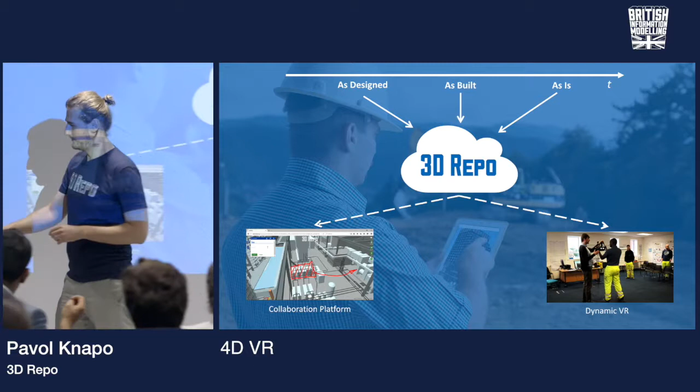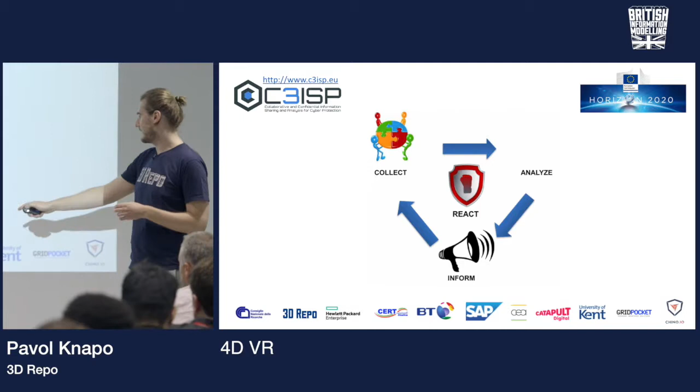At the moment we have a web viewer with really good, nice, neat issue tracking functionality, and also another application at this stage is our virtual reality application. We did one for health and safety, and we will talk more about the 4D one in a second. Security is becoming not just a buzzword but a real issue these days. We're also working with all these partners on a security innovation project, Horizon 2020.

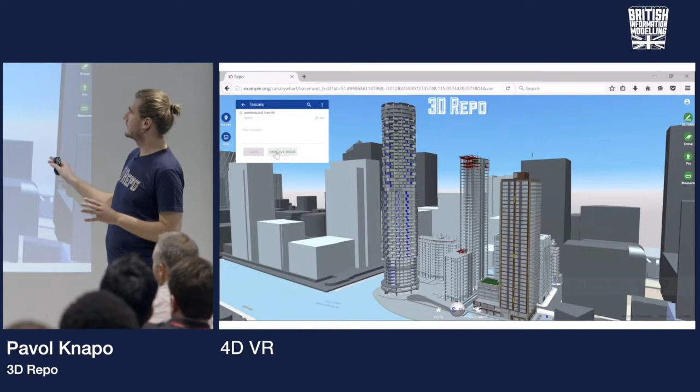So this is 3D Repo in a nutshell, in a quick video. It runs on a web browser, so that's one of the key features or key aspects. You don't need to install anything. We can support really large models, really pushing it until the breaking point.

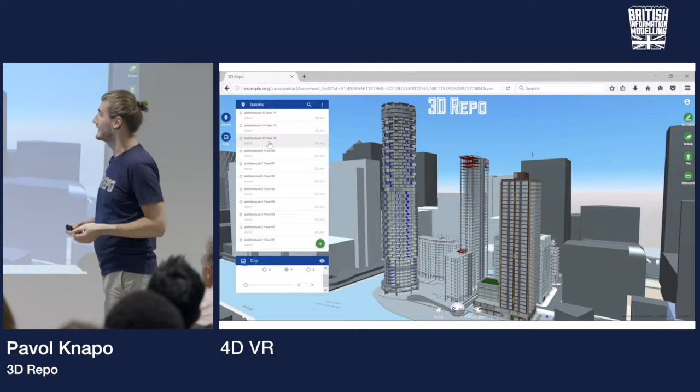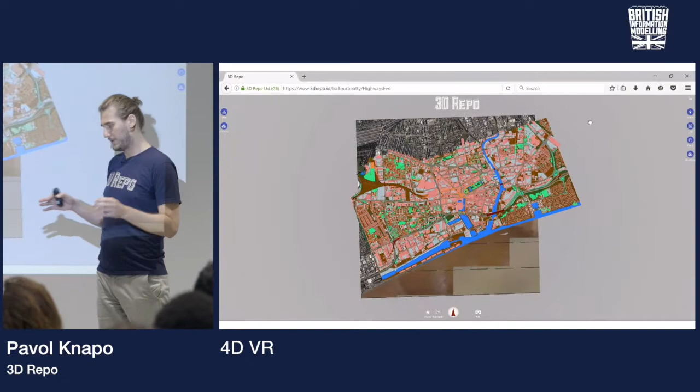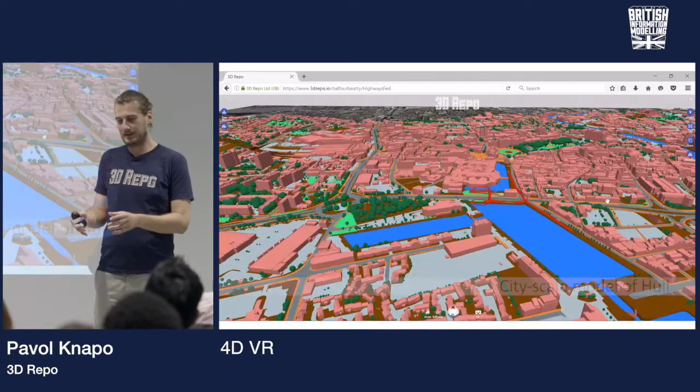But at the moment we can support a project in Canary Wharf, for example, with all not just the geometry but also the metadata. We try to also tap into the GIS world, because for us, BIM and GIS, the difference is just the scale. It's still, you have some geometry, you have some data, somehow structured. So we are fairly agnostic.

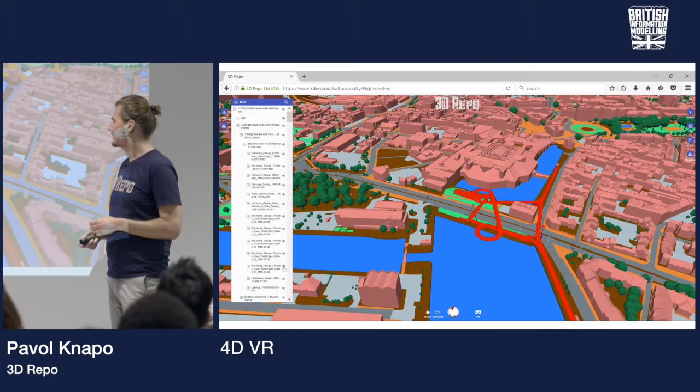So this is, for example, a project from Hull, where we worked with Balfour Beatty and Arup on some improvements of the streets there. And I hand over to Elliot to talk more about Bryden Wood.

Thanks, hi, so I'm Elliot. I'm the head of VR and AR in Bryden Wood. Who are we? So we are an integrated design and operation consultancy for the built environment, and our activities span from analysis to business strategy, engineering and architecture.

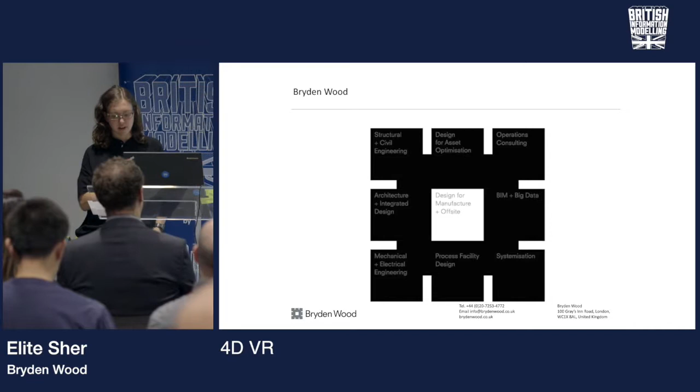We have a wide range of large-scale projects such as healthcare, residential, aviation, pharmaceutical, highways, and more. And BIM is very inherent to the way we work, so we also help shape BIM as an approach for the construction industry. We have a very unique approach to BIM and big data, which allows us to broaden and maximize the potential of the digital models that we work with, and it actually links to every step along the process.

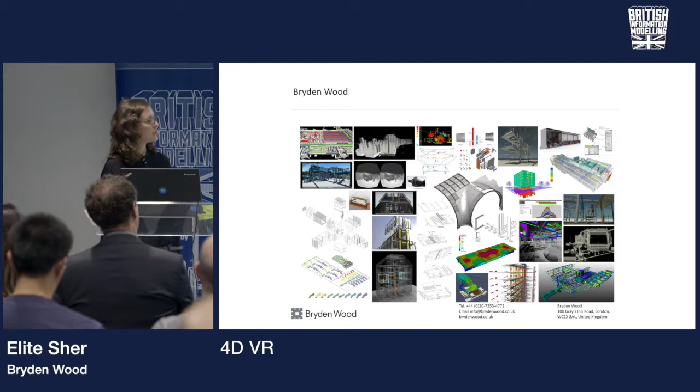So it starts from the business strategy all the way to the actual design. Our pioneering VR and AR work is actually part of the growth of the digital capabilities that we have. We focus mainly on creativity, productivity, collaborative work, and data analysis, and they are all integrated into our existing workflows.

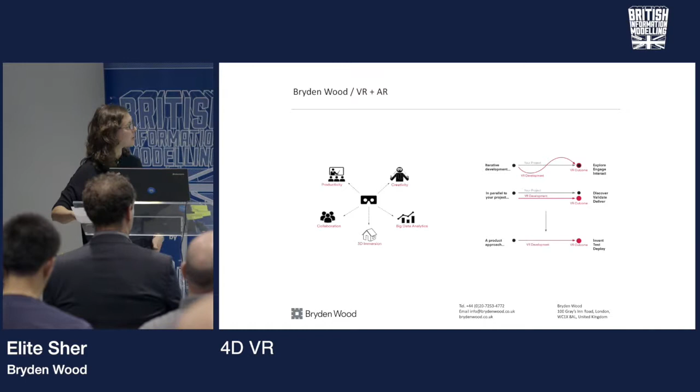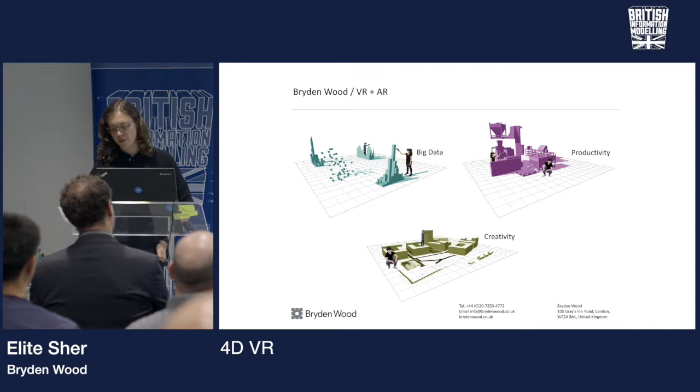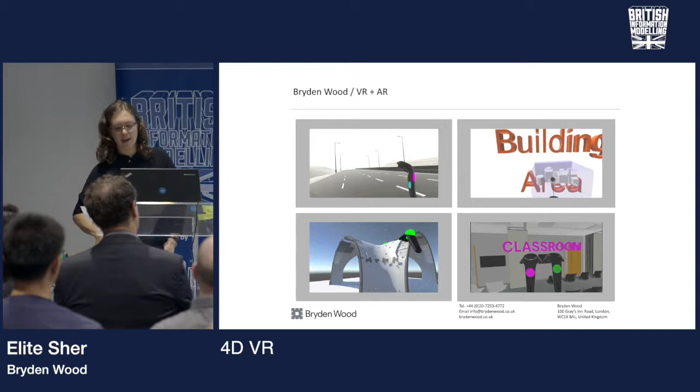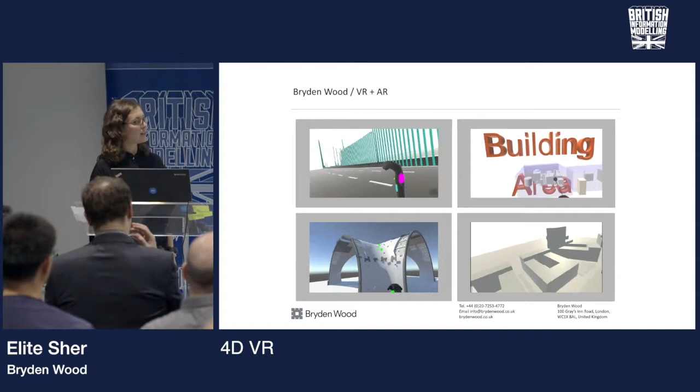Basically, the way we work is we work with our internal teams and our clients to develop bespoke VR and AR tools that would be part of the design process or standalone features. We use AR and VR for strategy, design, and delivery. And as part of our R&D work, we creatively develop features and then partner with companies like 3D Repo to implement them in a more complete and applicable way. I think the 4D sequence feature is a good example of the great collaboration that we had.

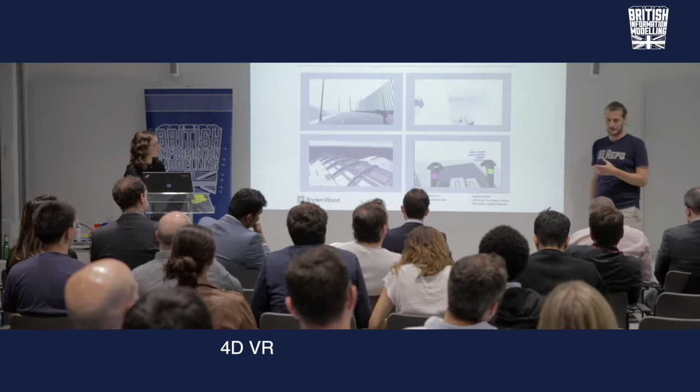Yeah, from our side, from 3D Repo's side, it has been an interesting collaboration between us as software developers and BIM consultants, and a multidisciplinary team like Bryden Wood's.

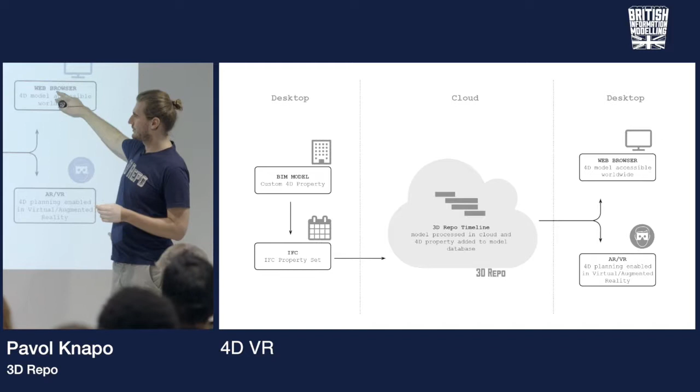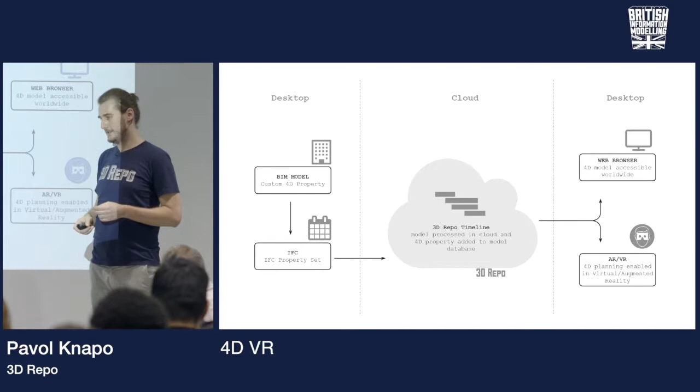So using the IFC property set, we can upload stuff to our cloud, to 3D Repo, where the model is crunched, and there will be a 3D Repo timeline available on the web. This is something in development, which we will have in the platform by Christmas. From the cloud, we can push the content to a web browser, as you saw in the videos before, or into virtual reality, which, by the way, I hope some of you already tried our VR application in the foyer. If you didn't, please give it a go after this presentation.

This is Bryden Wood's office, and this is what you need to set up VR, which is no longer a novel thing, but just to quickly recap: what you really need is a 3 by 3 space - if you have more, great, if not, that will do. Then you need a headset, some controllers, lighthouses which scan all the gear, and a decent PC with a good gaming card.

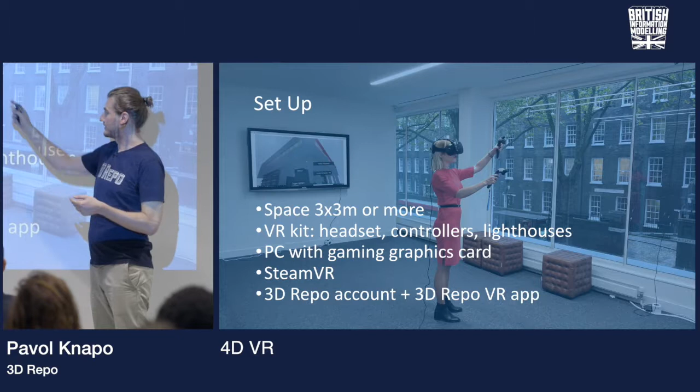So this was one lesson we learned: your BIM graphics card doesn't really work for VR. Don't ask me why, but it is actually the irony of it, right? You can buy a cheaper gaming card and get more out of your VR, and probably out of your BIM as well - but that's how they sell graphics cards. Then you need SteamVR, which is the application that links our application with the hardware, and of course you need a 3D Repo account and the application itself.

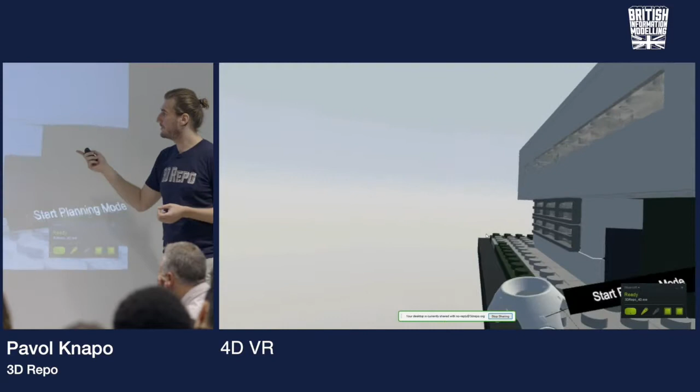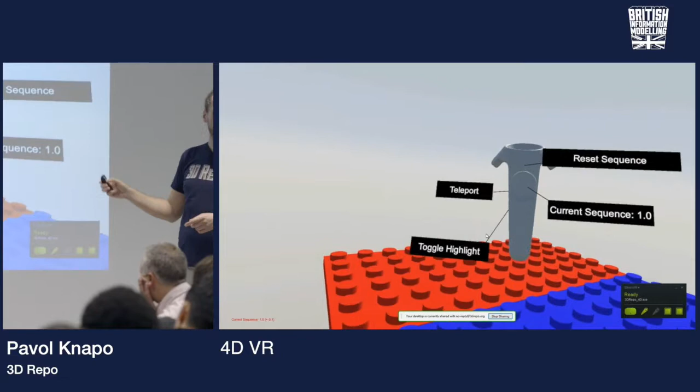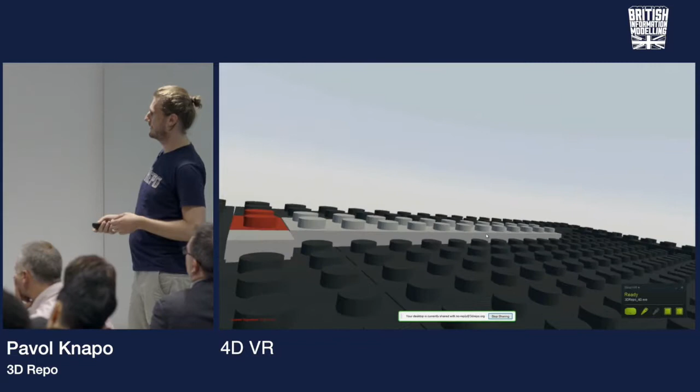And that's it - so this is the video from the app. Please try it yourself. And this is what it does: you are in virtual reality, you have your controller, and you can go through the sequences, go back and forth in time - hence the 4D in VR. How cool is that? And of course, yes, you can fly around the model and investigate and do what you need to do. It's a fairly simple and straightforward functionality, but this is what we try to do.

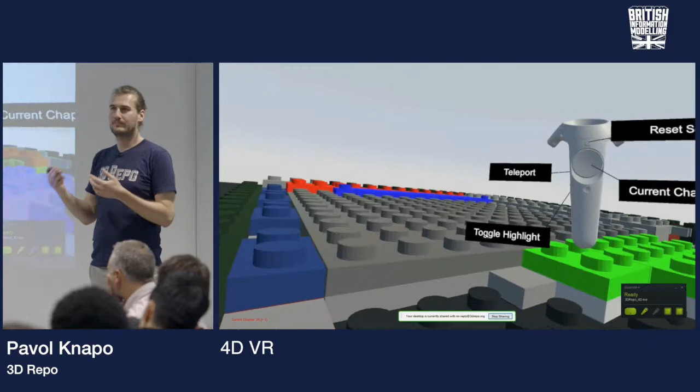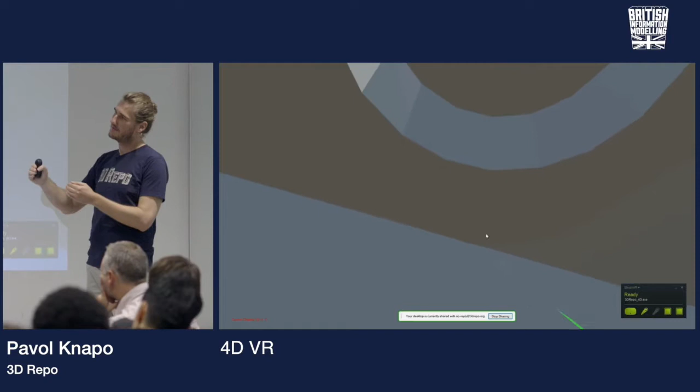We try to bring more and more useful features, and this was really a nice collaboration with Bryden Wood, because we talked quite a bit for a long time, and then we identified what would be a really nice feature to have, which would help them impress their clients, and also in their workflows.

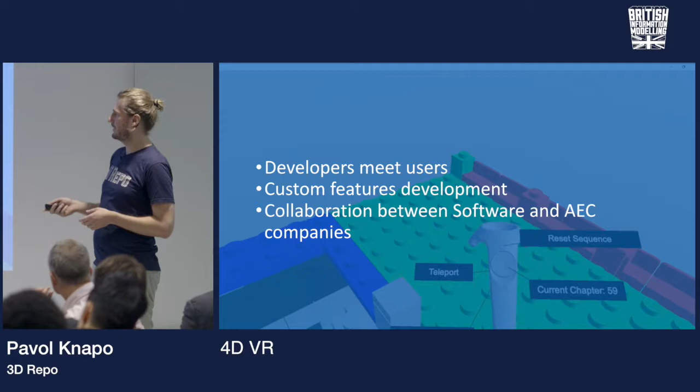So just to wrap it up, from our side it was an interesting experience that the development team, the software developers, could meet people from another industry, from engineers, which hasn't been happening so much. And now we live in an age where this is possible, right? It's no longer that we have this huge software company which sells licenses by the thousands.

These days, if you have some niche need, you can speak to companies like ours, and there's more and more software developers and BIM consultants having the ability to develop software. So this is what I'm quite excited to see, how these two worlds are getting closer, and the result of this is one of applications like this.

I think one of the most important points here is that we took the BIM models that we already have and just used more information from it to create this feature. So it's not any additional work, it's just part of the workflow. Exactly, just presenting it in a different way. Yeah, that's we try to be more clever about BIM.

Although this sounds a little bit cocky, I know, but we don't want to get caught into arguments about the acronyms and is this CDE, is this not CDE. Design teams produce a lot of data on a daily basis, and a lot of it is actually quite useful, but it never makes it further than the hard drive on the computer. So we just thought it's a little bit of a shame, and this is what this collaboration was all about.